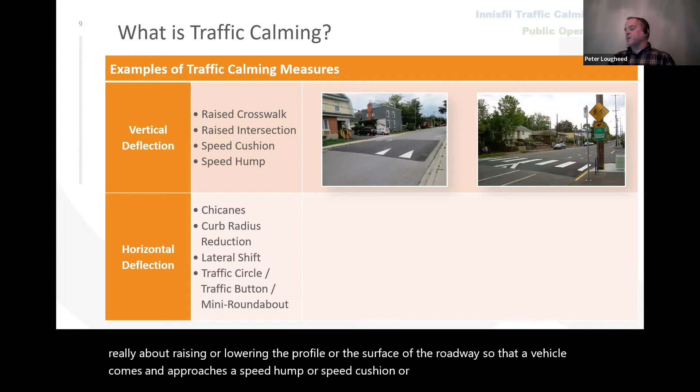Vertical deflection is about raising or lowering the profile or surface of the roadway, so that if a vehicle approaches a speed hump or speed cushion, they feel uncomfortable as their car changes, going up or down. Some examples here are a speed cushion and a raised crosswalk.

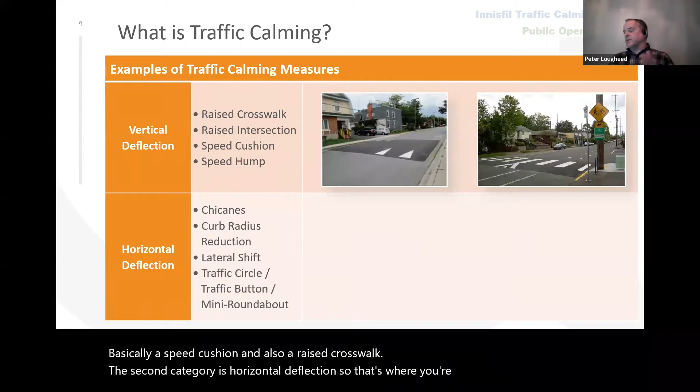The second category is horizontal deflection, where you're getting cars to veer a little left and right, again making them uncomfortable if they're going too fast. One application is called chicanes, shown in the first picture on the right with the arrow - we'll talk about this more later, but the idea is people have to steer around these obstacles and therefore slow their speed down.

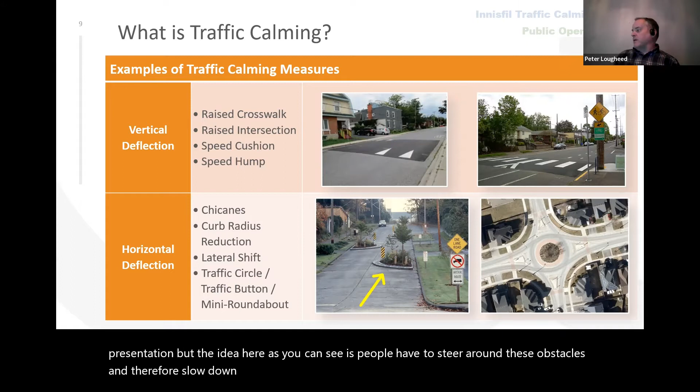Another common technique is traffic circles and mini roundabouts. These are not as large as full-size roundabouts and may only have been put in place to slow people down - you'll see a lot of that in old quarters of some older cities.

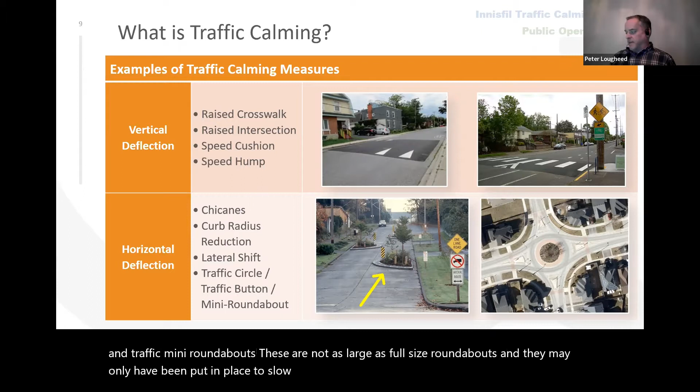The next category is roadway narrowing, which is basically as it sounds - taking a lane that might normally be 3.5 or 3.7 meters wide and reducing the width. This gives the driver a sense of something closing in on them a little bit, makes them less comfortable driving fast, and hopefully slows them down. There are other examples there of ways you can do this.

In terms of surface treatment, what's been done is to change the surface texture of the roadway, so when someone's driving along, they don't even realize it, but they start to go over a different texture - the car might vibrate a little and they may feel uncomfortable if going too fast. This can be done with sidewalks, crosswalks, and even rumble strips, which is not ideal because you tend to get a real shock when you hit one of those.

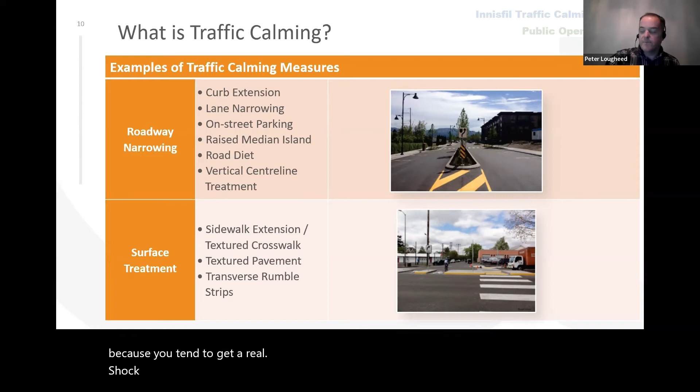Another type of pavement marking is these on-road signs where you paint right on the road a message or so on. As they're driving towards it, they subconsciously or consciously will read the message and hopefully slow down.

Here's something a little larger in scale when we talk about design elements. One is to use gateways, done in a lot of communities where you're coming in from the rural area into the urban area - you actually have a gateway, signs that are up, giving them a heads up that they're going into a different environment, and hopefully they instinctively slow down.

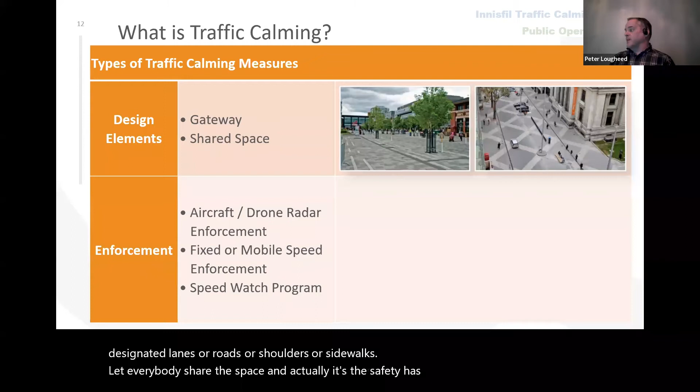In Europe, they've taken that another level in some towns where they don't have any designated lanes or roads or shoulders or sidewalks and let everybody share the space. Actually, the safety has stayed very stable, and at the same time, people are slowing down.

The next category is enforcement. This is not always the preferable way to approach things - you tend to want to have something in place, but enforcement comes in, and this could be drones or aircraft, or even just the signs you see that are fixed or mobile on the side of the road that can display your speed and maybe even record it.

Then we get to education, and most things do. This is about the different types of programs that can be instigated in communities to make young drivers aware of the issues related to traffic calming and safety.

The PACE car program is where you'd have, say, during the time school's out and the kids are all out on the sidewalks, a car goes through with a person designated to go back and forth through the zone, slowing down the entire platoon of cars going in each direction. That's a little drastic, but it has been used successfully.

Then the last category is emerging technologies, and these things are coming up all the time, all over the planet. Some include LED pavement markings, where they embed lights in the roadway that can light up during the day and night and make drivers aware of lane changes or that they're going too fast.

There's several others - one quite simple to apply is rest in red signal phasing, when you have a signalized intersection that's actuated, so it only turns green when a car approaches, but when nobody's around, all the lights are red, so everybody has to slow down when coming into that intersection.

Okay, there you go. Okay, all right, thanks, Peter.

So it's another poll time. Peter's gone through and introduced you to a number of different types of traffic calming measures. So what we want to find out from you is whether you would support a traffic calming measure in front of your home. We have a poll here - would you support some sort of measure in front of your home? Yes, definitely yes, but it may depend on the type of measure, no, or maybe you're not sure.

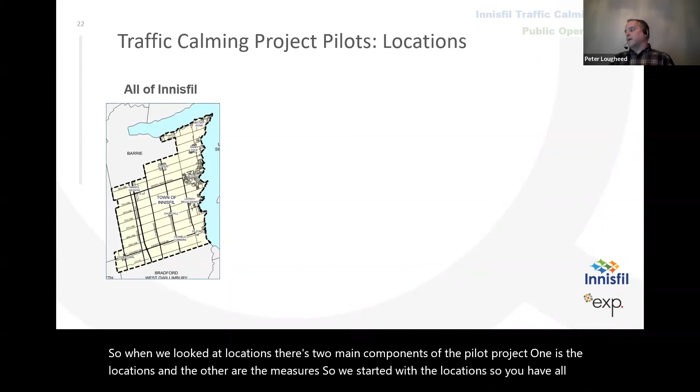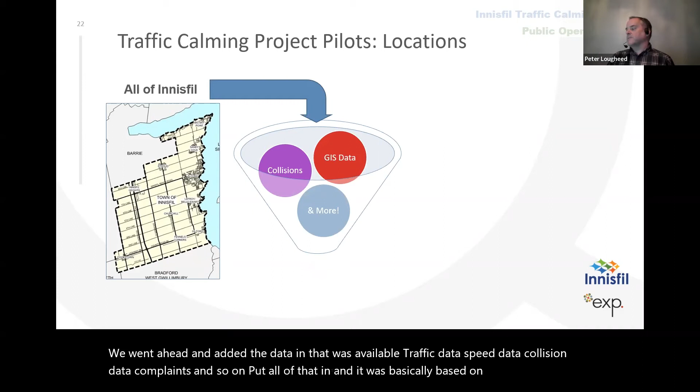We had a GIS model representing the entire community of Innisfil. We added in the data that was available: traffic data, speed data, collision data, complaints, and so on. This was basically based on the warrant system existing for the town. But when we did that, at first we ended up with no choices.

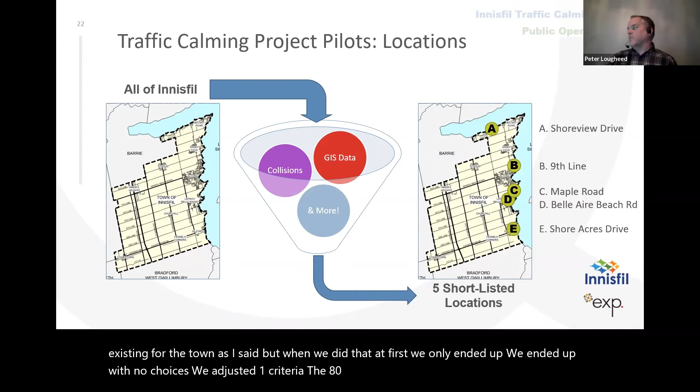We adjusted one criteria, the 85th percentile speed, and when we did that we were able to get it to come out with 5 locations: Shoreview Drive, 9th Line, Maple Road, Belle Aire Beach Road, and Shore Acres Drive. These were our shortlisted 5 locations.

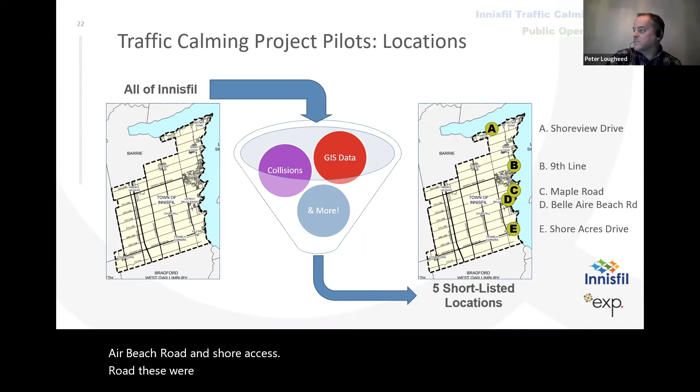When it came to measures, I showed you all the different categories and potential measures within each category. In the end, we ended up with a master list of 46 traffic calming measures. We quickly got that down to 28 that would be applicable in this type of environment in your town. From there, we had a short list of 13 traffic calming measures. I'm just going to talk about those for a second.

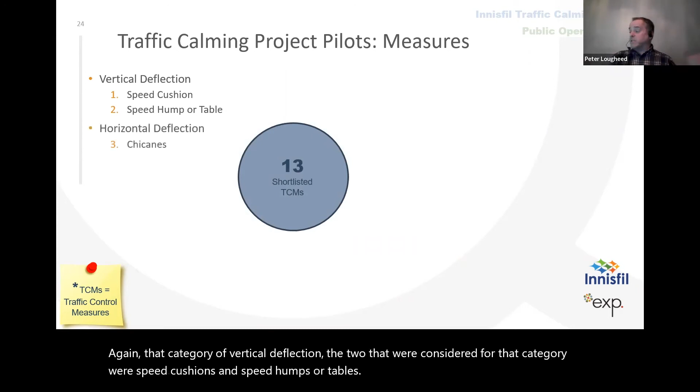In the category of vertical deflection, the two measures considered were speed cushions and speed humps or tables. Horizontal deflection is the chicanes—the idea of shifting cars back and forth in the travel path. Road narrowing is the idea of actually reducing the width of the road or the lanes themselves. Also using pavement markings, there were 4 different ways to do this: converging chevrons, on-road signs, full-lane transverse bars, or peripheral transverse bars.

For enforcement, we looked at whether automated speed enforcement might be an option. As always, education—which might be misunderstood sometimes, it's not just sending out a flyer in the mail. It could be when somebody's driving by and sees their speed go up on a digital sign; that's actually a form of education as well. Those are the other 2 options we considered for education.

In terms of emerging technologies, 3D pavement markings aren't commonly used, but the idea is to put down a stretched-out image, say of a child, so that as a person drives forward, they see it as an actual child standing on the roadway. It could also be piano keys on a crosswalk that make it look like the crosswalk is floating above the surface.

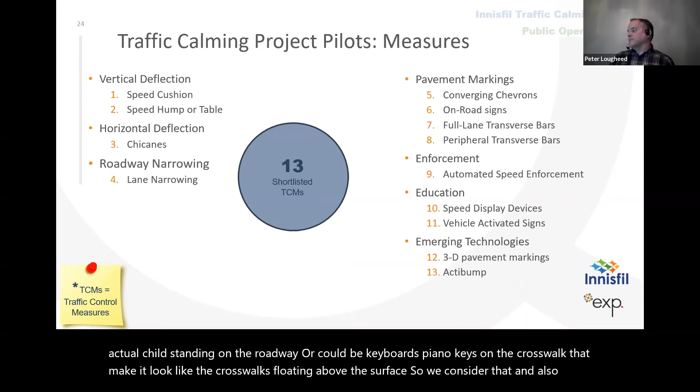So we also considered the ActiBump. It's a special technology with a spot that, if somebody's going too fast, actually drops down the surface of the road through a mechanism, causing the driver to feel uncomfortable traveling that fast.

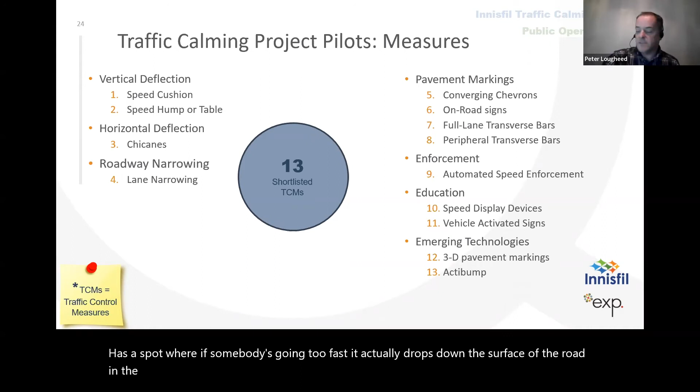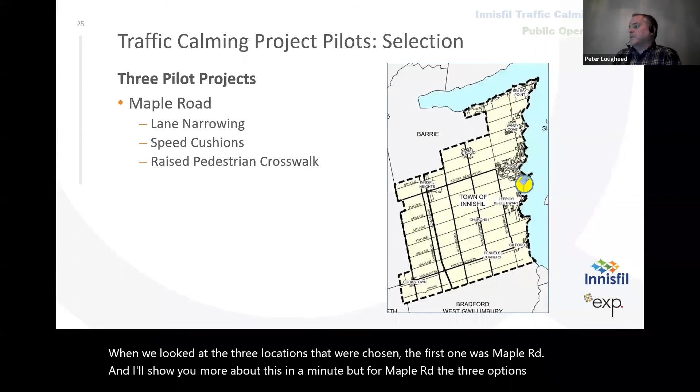So when we looked at the three locations that were chosen, the first one was Maple Road, and I'll show you more about this in a minute. For Maple Road, the three options chosen were lane narrowing, speed cushions, and a raised pedestrian crosswalk. At Belle Aire Beach Road, we're implementing the chicanes option, which I'll also show more about in a minute.

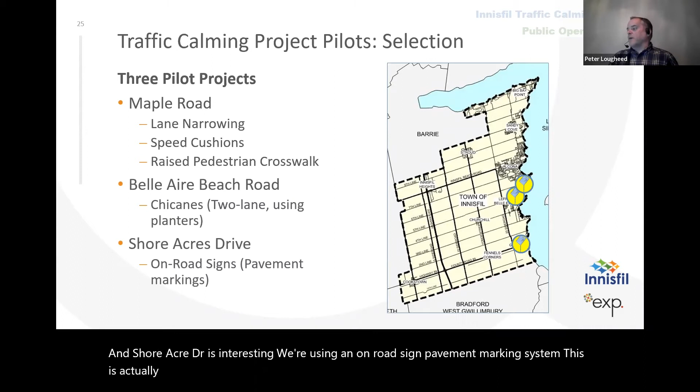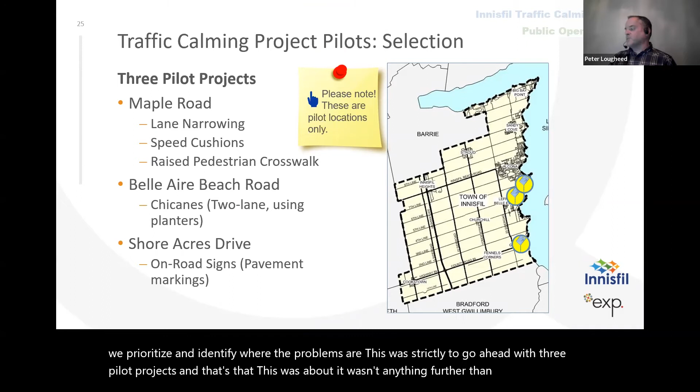And at Shore Acres Drive, we're using an on-road sign pavement marking system. This is a more low-cost way of addressing speeding, just putting pavement markings on the road, and we're hoping to get feedback on this because it's nice to have an option that's not as expensive as the others. I want to make sure everyone knows this is not our recommendation for where in the town there are speeding problems — that's later on, in the 10-year plan where we prioritize and identify where the problems are. This was strictly to go ahead with three pilot projects, based on the output from the original model and communications with the town.

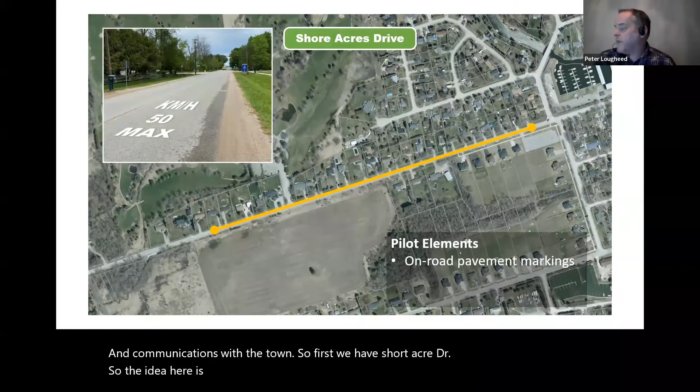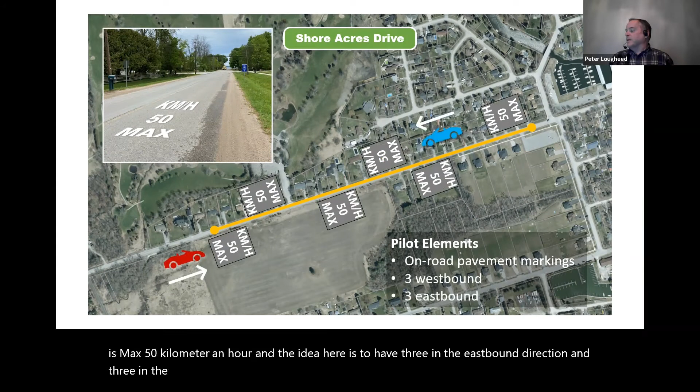So first we have Shore Acres Drive. The idea here is to implement the on-road pavement marking, which would say 'Max 50 km/h'. The plan is to have three in the eastbound direction and three in the westbound direction. As you can imagine, over time these would wear off, but they are a lower cost application. That's what we're doing for Shore Acres Drive.

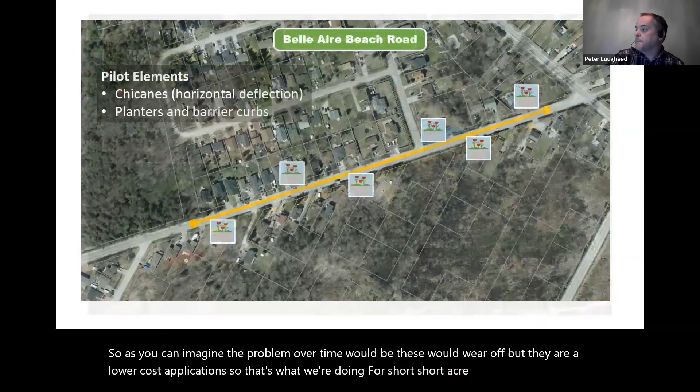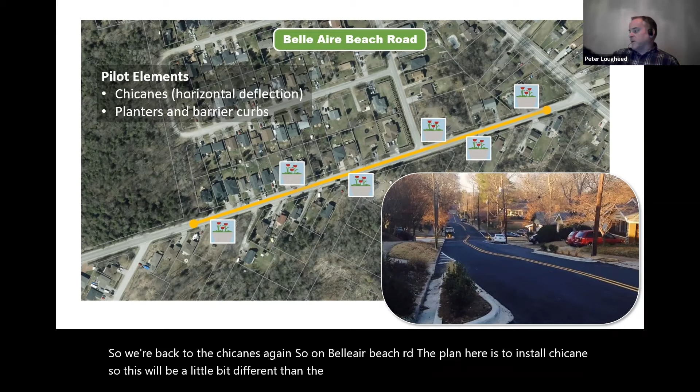So we're back to the chicanes again. On Belle Aire Beach Road, the plan is to install chicanes. This will be a little different than the picture — we're going to have a curb that goes around a planter box, raised much higher, so a driver approaching will see this obstacle in front of them.

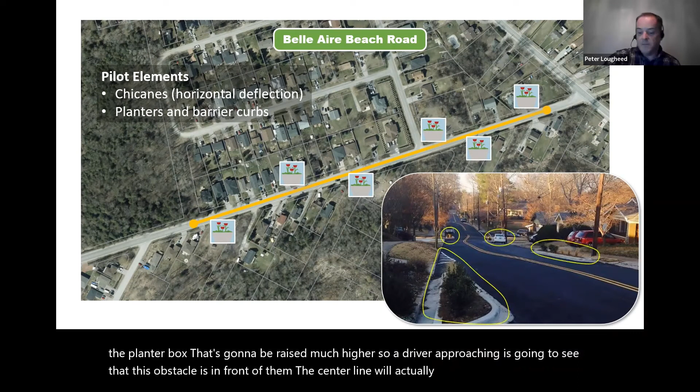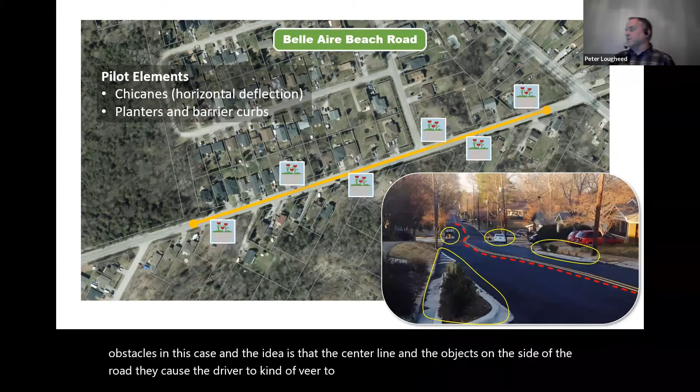The center line will guide them, and with the obstacles in place, the idea is that the center line and the objects on the side of the road cause the driver to veer to one side and then the other, making it very uncomfortable for them to try to go through at high speeds.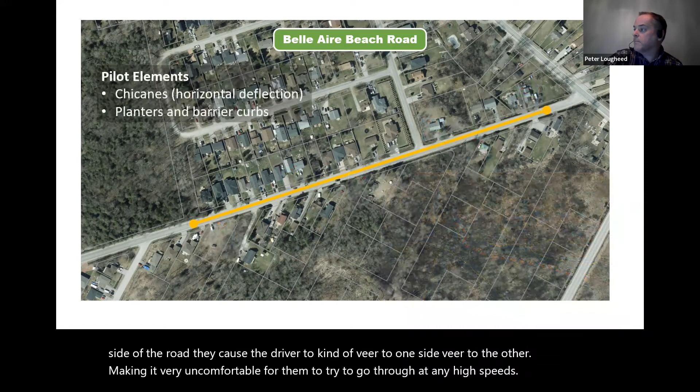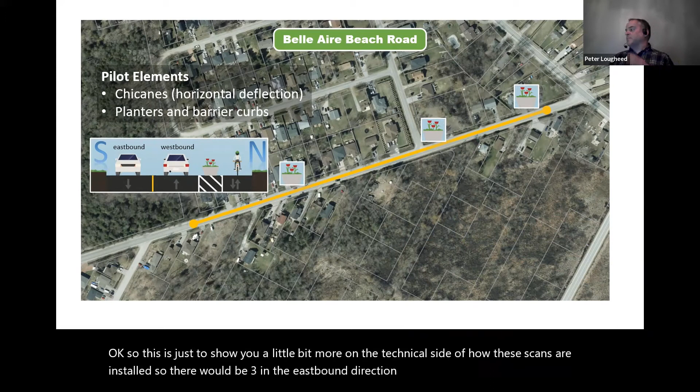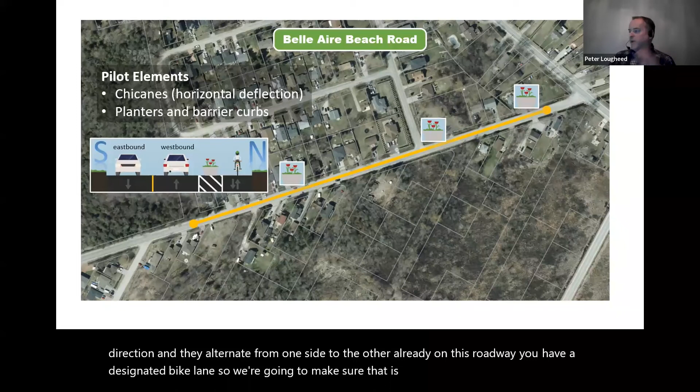This shows a bit more of the technical side of how these chicanes are installed. There would be three in the eastbound direction and three in the westbound direction, alternating from one side to the other. This roadway already has a designated bike lane, so we're making sure that's not intruded on by the way the lanes shift back and forth, or by where the planters are placed. In one direction, the bike path will be behind the planters, and in the other direction it will be on the other side from the planters — so we're not reducing the width of the cyclist lane at all.

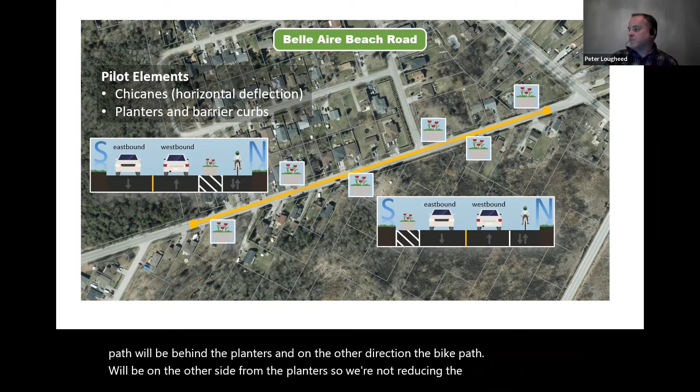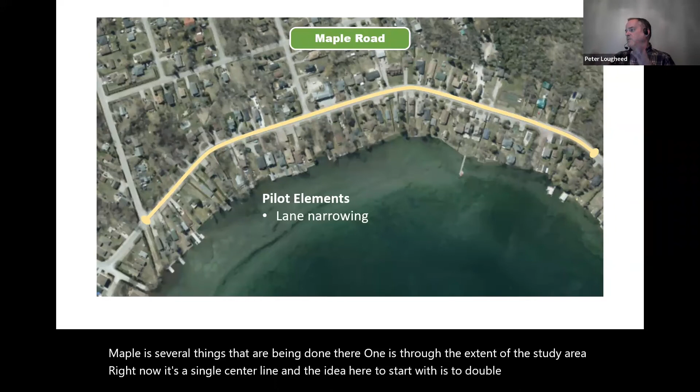Several things are being done on Maple Road. One is, through the extent of the study area, right now there's a single center line, and the idea is to double it into two parallel lines. Right away, this causes the lanes to be more narrow — just a simple application of paint makes those lanes narrower. We're hoping to get positive effects there.

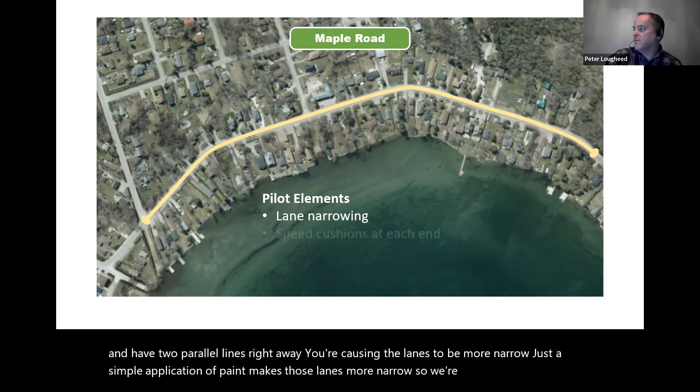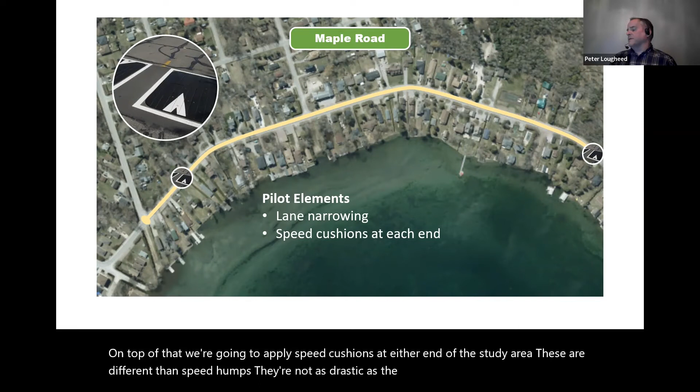On top of that, we're going to apply speed cushions at either end of the study area. These are different from speed humps — not as drastic, they don't jar your teeth as much when you hit them, but they still make it uncomfortable to go over fast. As you can see in the upper left-hand image, there's room for emergency vehicles to straddle these so they don't get jarred up and down as well.

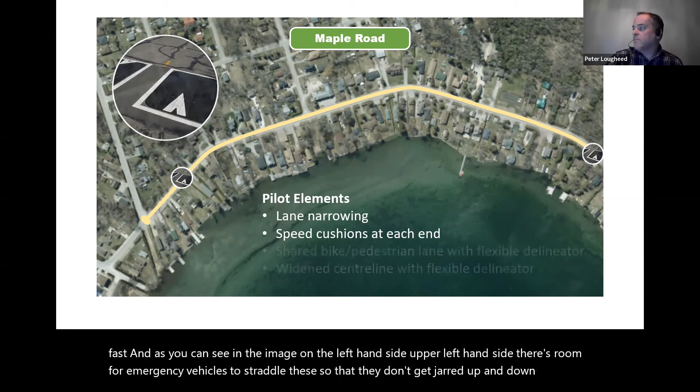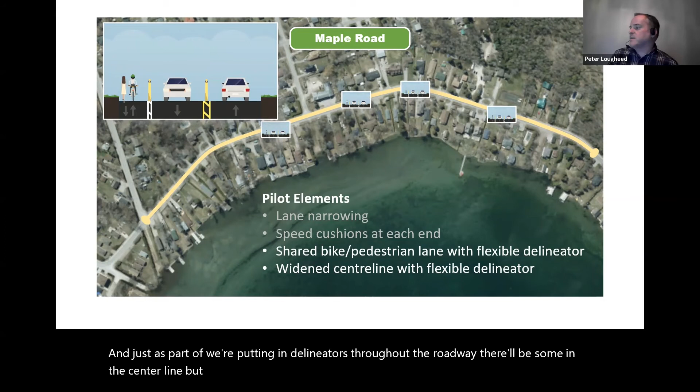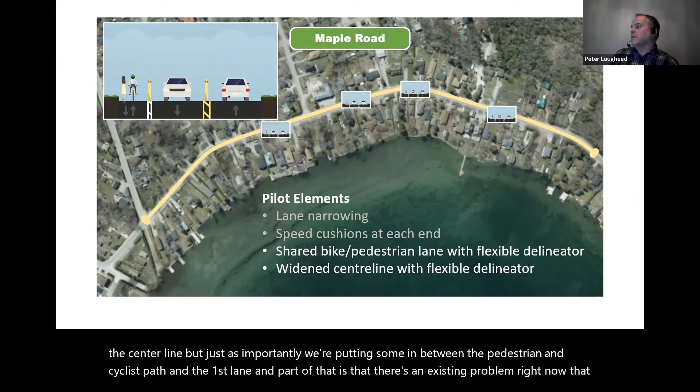As part of this, we're putting in delineators throughout the roadway. There'll be some in the center line, but just as importantly, we're putting some between the pedestrian and cyclist path and the first lane. There's an existing problem where some people illegally park in the bike lane. This won't physically stop them, but it'll make it very clear that line's not to be crossed, so there's an added benefit we're testing here as well.

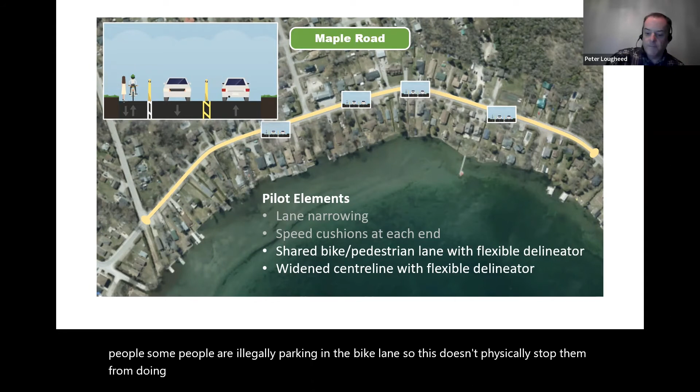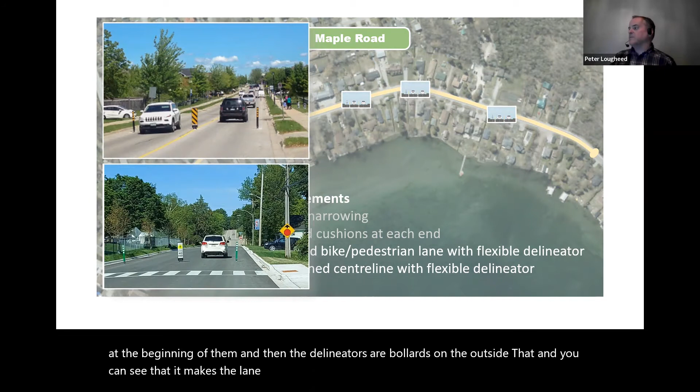This is sort of what it would look like. These roads you're seeing have just a single center line, or none, but we're going to have double center lines with an object marker at the beginning, and then delineators or bollards on the outside, which makes the lane narrower. This type of application can slow vehicles down, so that's what we're testing.

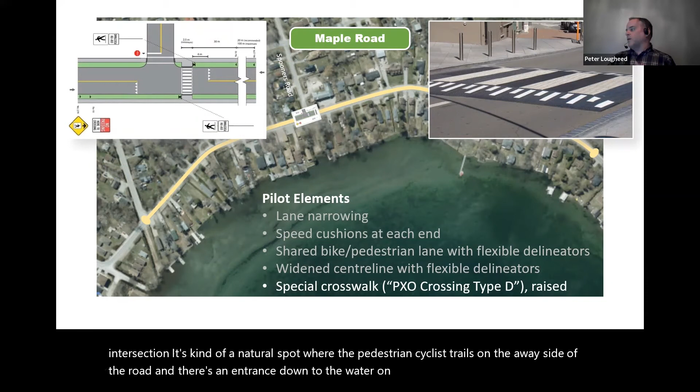There's one other important application we're doing here at Spooner's Road, that T intersection. It's kind of a natural spot where the pedestrian cyclist trail is on the away side of the road, and there's an entrance down to the water on the other side, which people are walking on. So we're suggesting this is formalized with an actual PXO crossing, and in this case, we would have a raised pedestrian crosswalk.

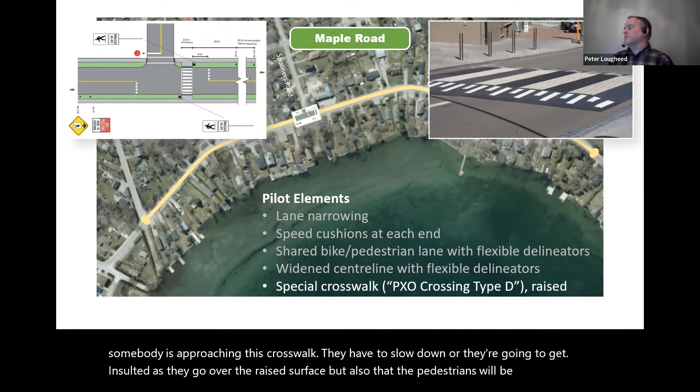The two benefits here: if somebody is approaching this crosswalk, they have to slow down or they're going to get jolted as they go over the raised surface, but also the pedestrians will be raised a bit higher and become more visible to approaching drivers. So there's a heavy safety influence here.

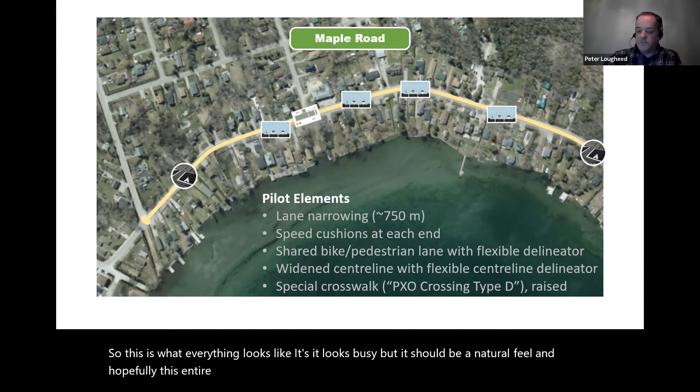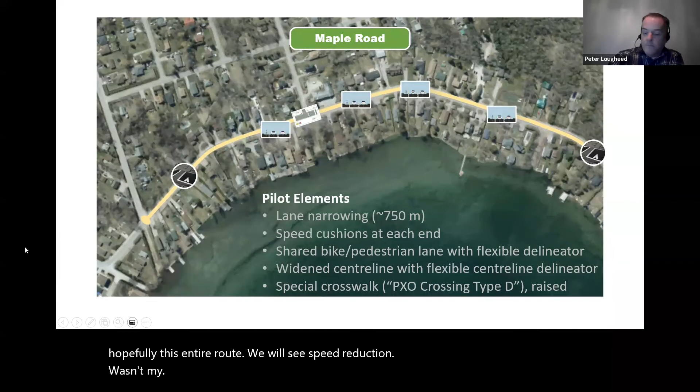Moving forward to the 10-year traffic calming program. The objectives here are to provide a full inventory of the town's potential traffic calming locations that could be implemented in a prioritized way over the next 10 years. This inventory will be based on collision data, collision locations, traffic data, volume data, and community inquiries. That's what we're hoping to get feedback on from the town moving forward.

The program will include criteria and methodology for prioritizing the potential locations, and that's a big problem. If you have 10 locations and you want to put them everywhere, but you can't, where are the top 5? That's what we're going to try to develop for the town.